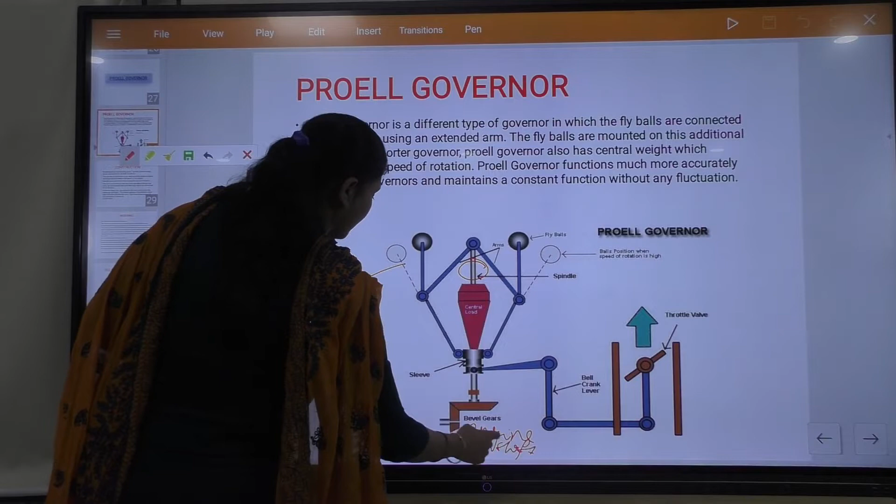So, let me again remind you of the parts. This is the spindle of the Proell governor which is connected with the engine shaft. Here your engine shaft will be there, and you can see this is the bevel gear which connects the spindle with the engine shaft. So, these are your arms. One end of the arms is pivoted with the spindle at this point, and these are your links. This is one link, this is another link.

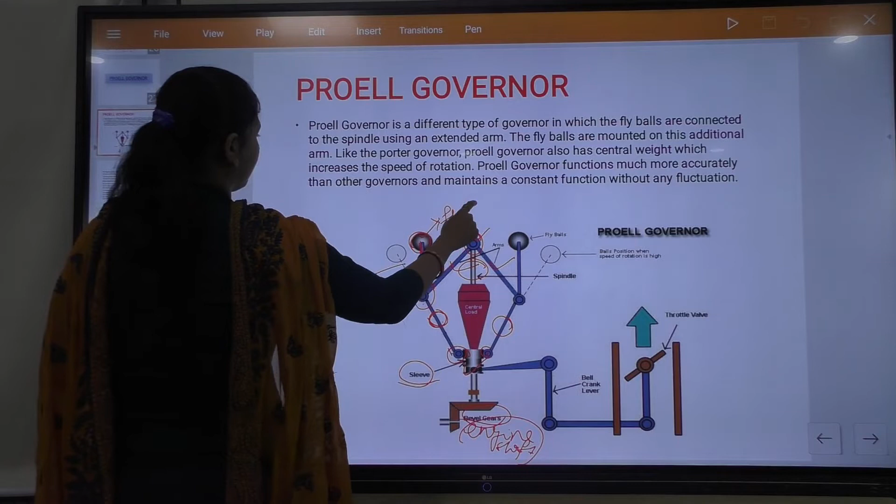One end of the link is connected with the arm at this point, and the other end is connected with the sleeve. This is your sleeve. So, from this point, this is your extended arm which is connected with the fly balls. This is the fly ball. This side also, this is your fly ball.

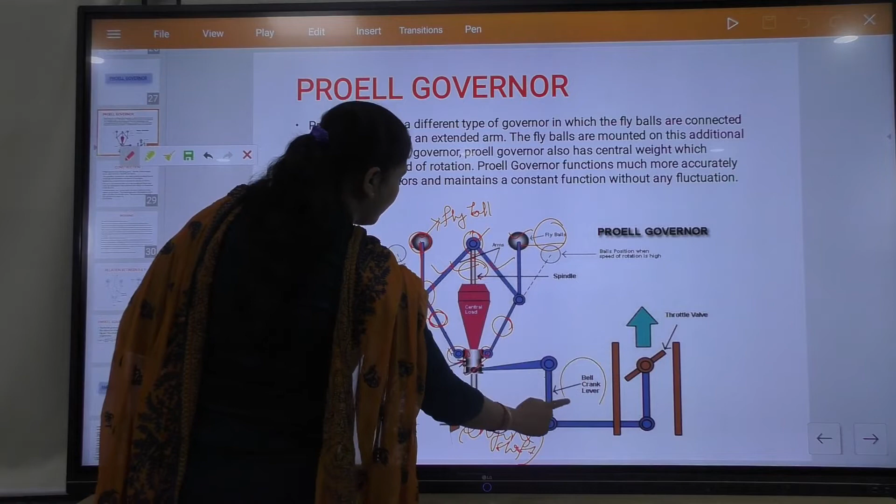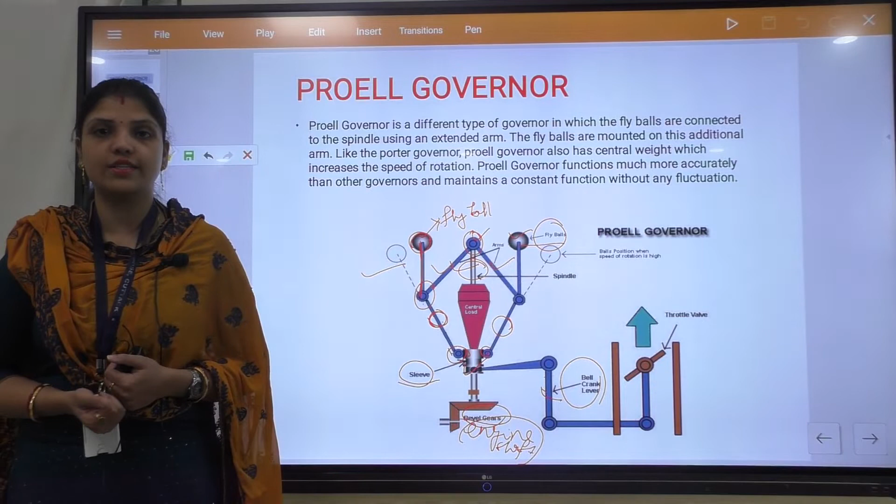So, this sleeve is connected with the throttle valve with the help of a bell crank lever, and it operates the mechanism of the fuel flow. So, this is all about the construction of the Proell governor. We already discussed the construction part, so let us move towards the working of the Proell governor.

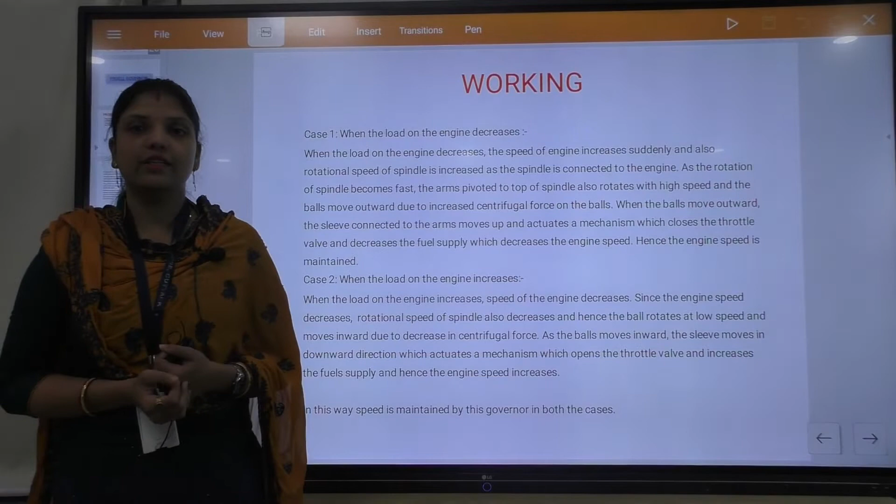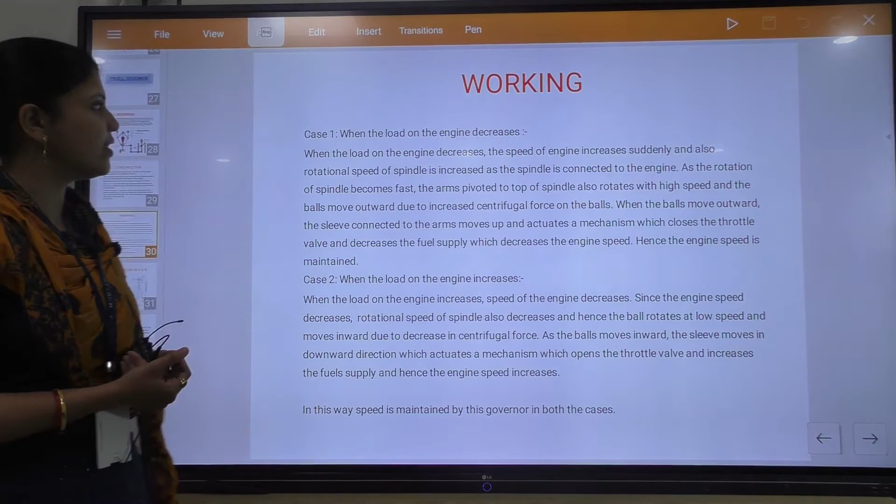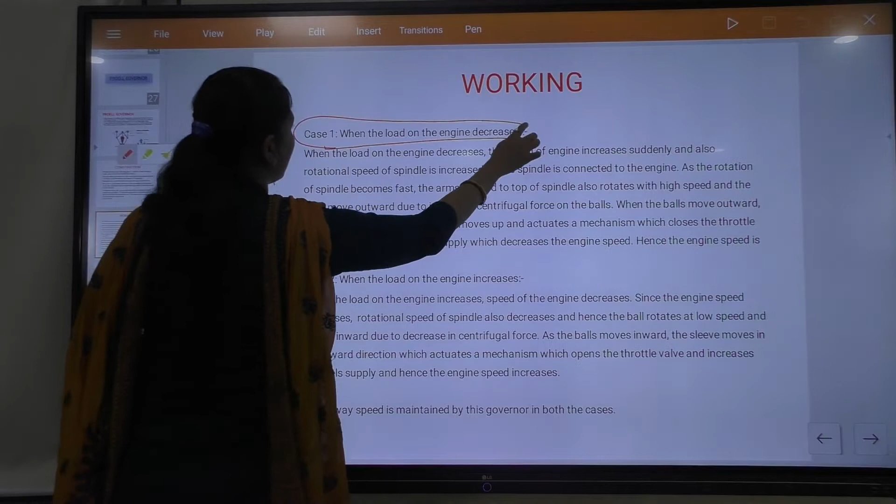As studied in the case of other governors, there are two cases for working: first, when the load on the engine increases, and second, when the load on the engine decreases. So, let us consider case 1, that is, when the load on the engine will decrease. So, what will happen? When the load decreases, we already studied that the speed of the engine will increase.

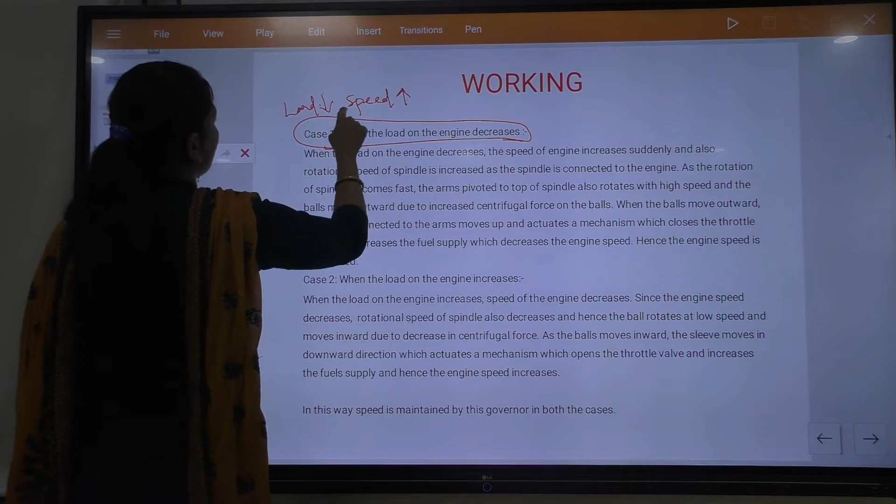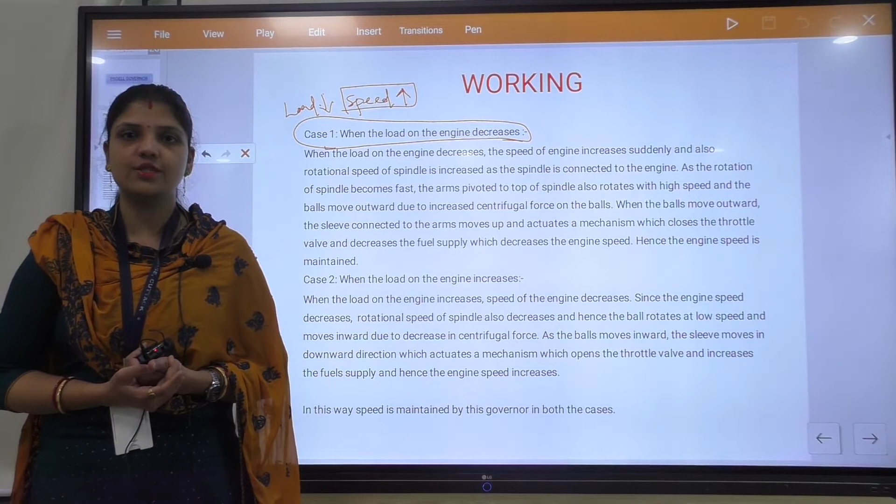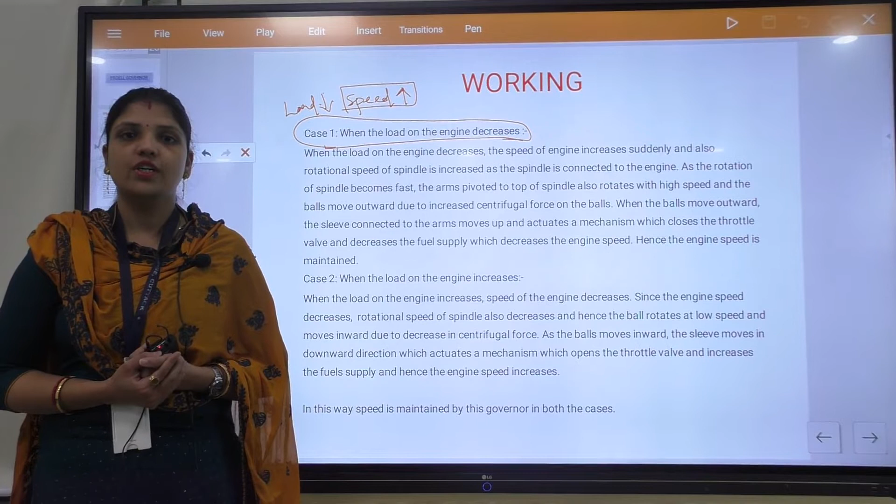So, when the speed of the engine increases, since the spindle of the governor is connected with the engine shaft with the help of a bevel gear, the rotational speed of the spindle will also increase. Due to the increase in the speed of the spindle, the governor balls will move in the outward direction, because the centrifugal force on the governor balls will also increase, and due to this outward movement of the governor balls, the sleeve will move in the upward direction about the spindle.

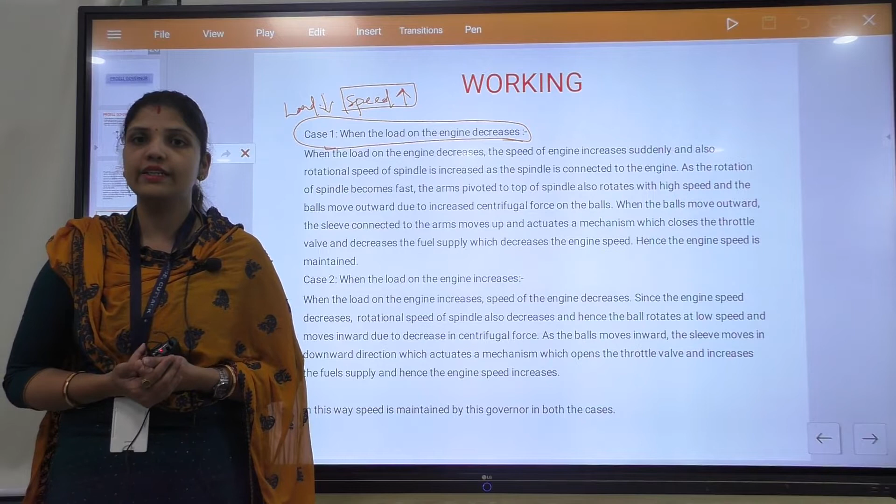Due to the upward movement of the sleeve, it will activate the mechanism of closing of the throttle valve with the help of the bell crank lever, since the sleeve is connected with the throttle valve through the bell crank lever. Due to the closing of the throttle valve, the supply of fuel or working fluid will decrease, and due to this decrease your speed will also reduce, and our mean speed can be maintained. So, this is case 1, when the load on the engine decreases.

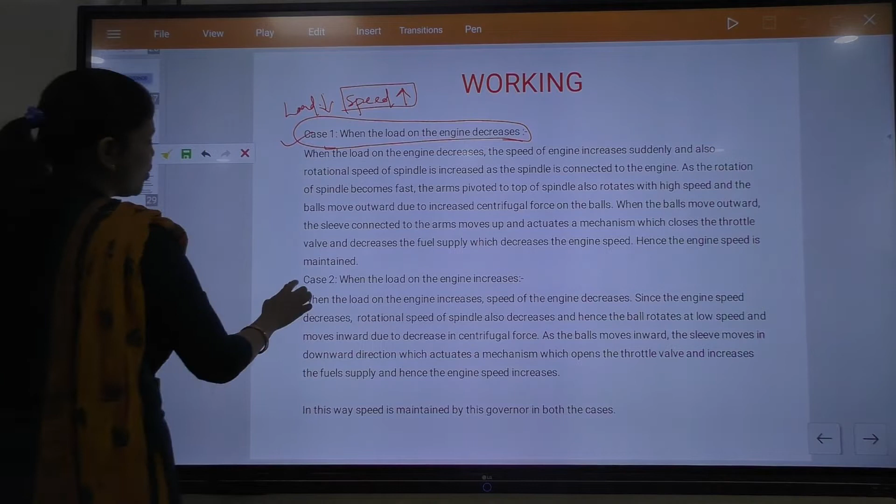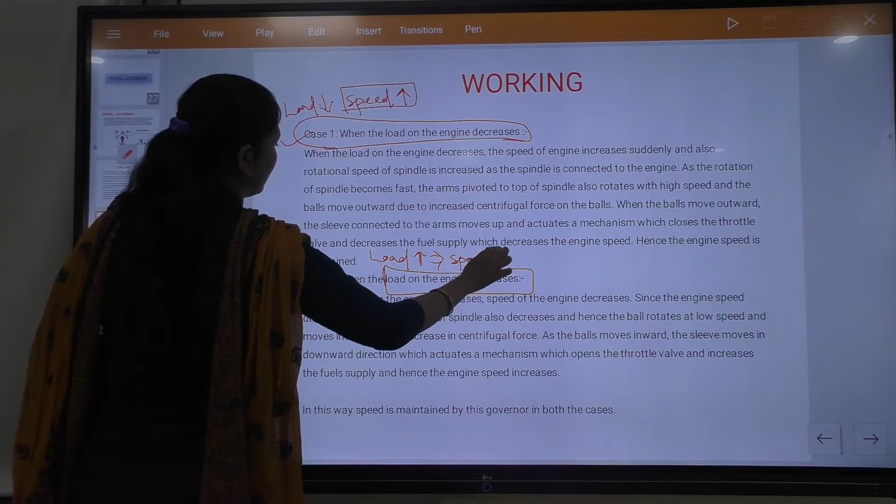Now, come to case 2, that is, when the load on the engine increases. So, what will happen? When the load on the engine increases, it will reduce the speed of the engine. As I said in case 1, the engine is connected with the spindle of the governor with the help of a bevel gear. So due to the decrease in the speed of the engine, the rotational speed of the spindle will also decrease.

Now the centrifugal force on the fly ball will also decrease, and due to this decrease in centrifugal force, the fly ball will move in the inward direction. Due to the inward movement of the fly ball, the sleeve will go in the downward direction, and this downward movement of the sleeve will activate the mechanism of opening of the throttle valve, since the sleeve is connected to the throttle valve with the help of the bell crank lever.

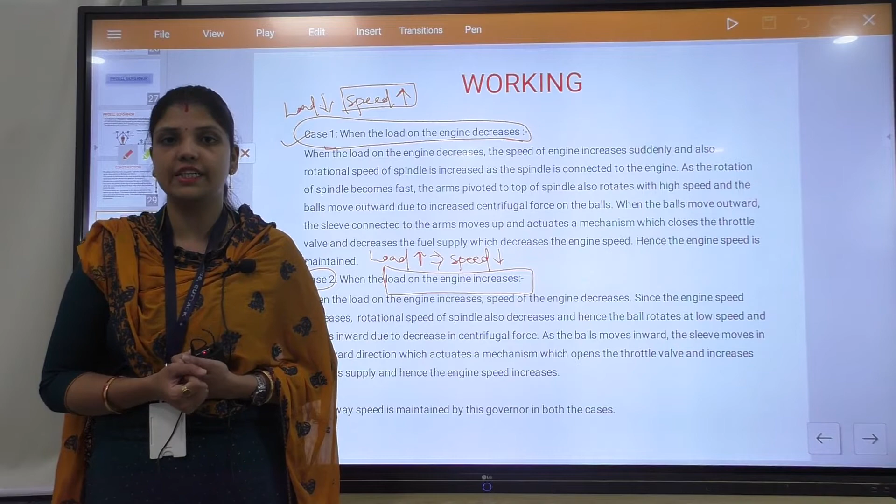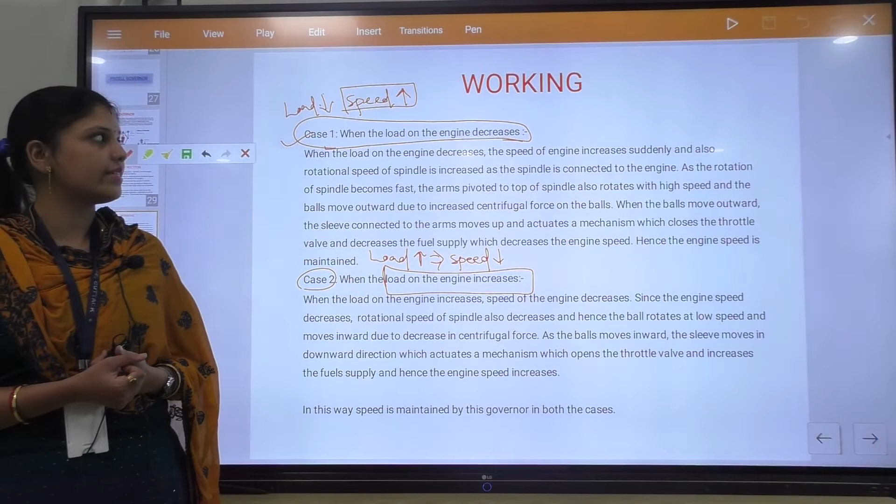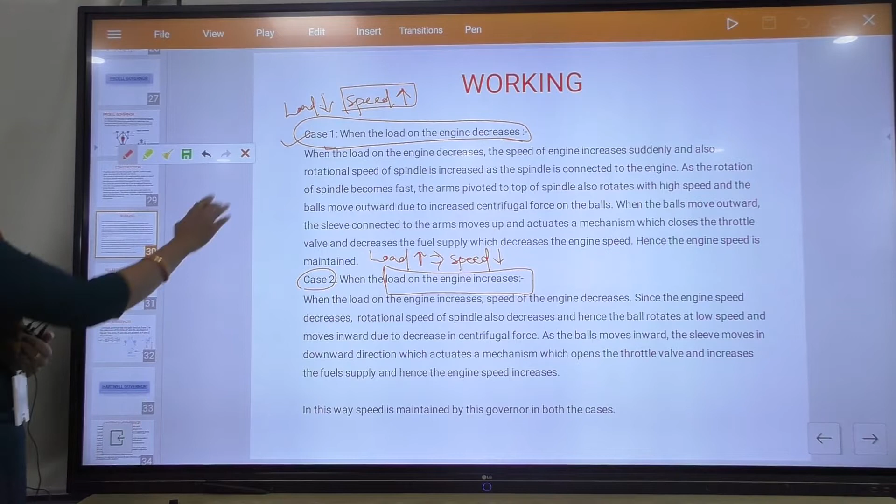Due to the opening of the throttle valve, the fuel supply will increase, and this increase in fuel supply will help in increasing the speed of the engine, and hence the mean speed of the engine can be maintained. So this is all about the working of the Proell governor, and in this way the mean speed is maintained in both cases, when the load decreases and when the load increases. So this is the functioning or working of your Proell governor.

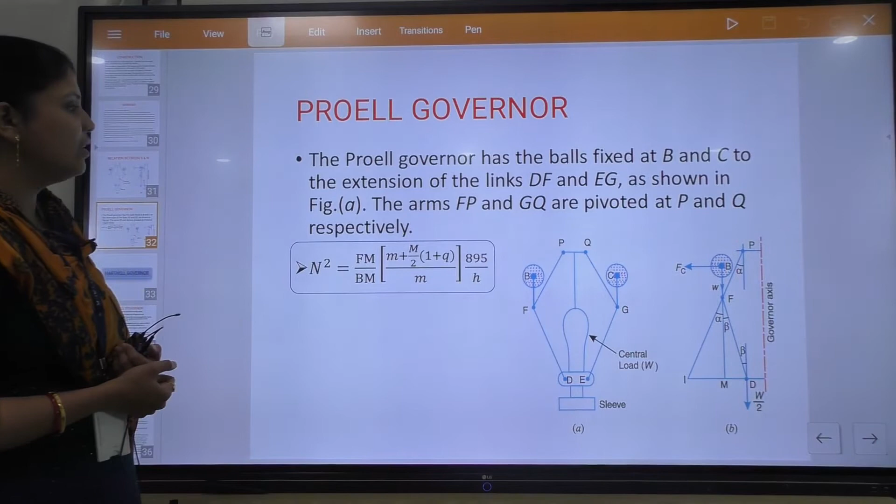Now come to the relation between the height of the Proell governor and the rotational speed. So, before going into the relation, let me tell you the terminologies which are given in the free body diagram.

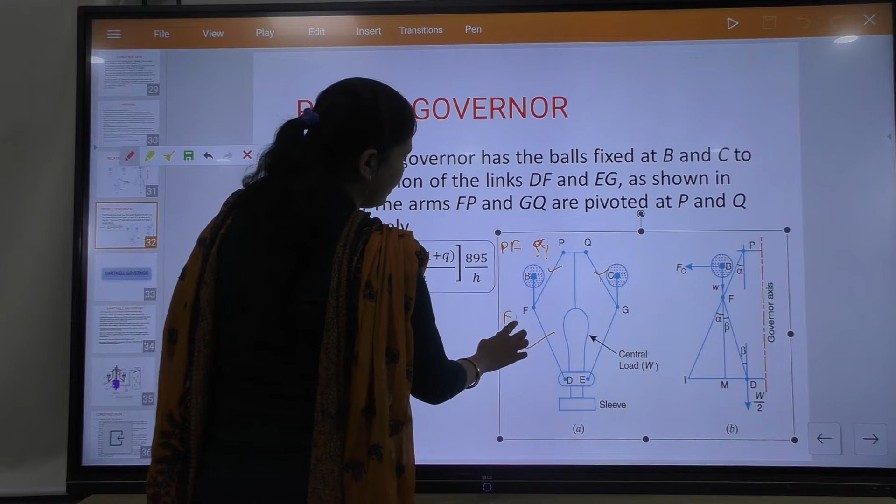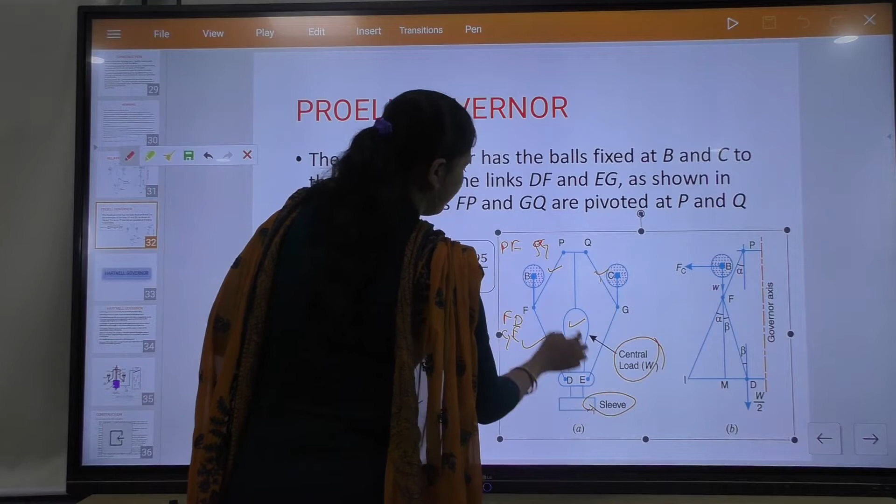So this is the diagram of your Proell governor. This is your arm, denoted by PF and QG. These PF and QG are your arms. These FD and GE are your links. This is the central load whose weight is denoted by W. This is the sleeve. This is the extended arm, that is BF, and this is your fly ball. Okay. This is another extended arm, CG.

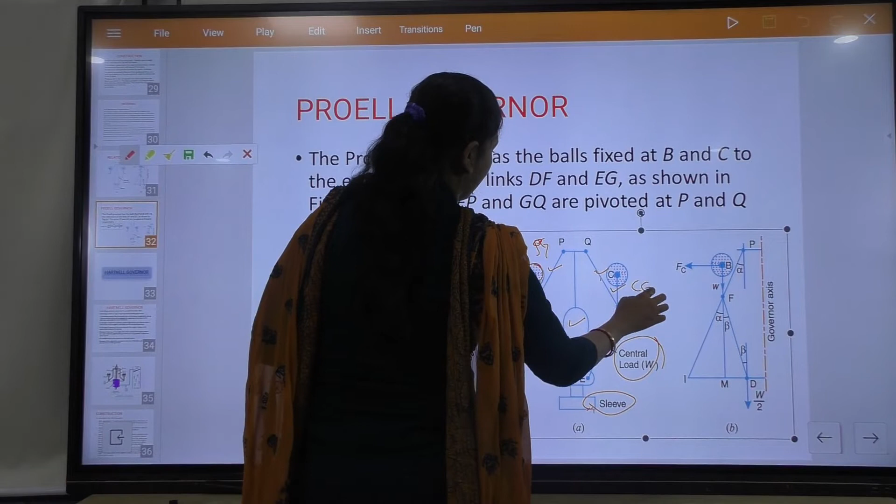So this is the free body diagram. This diagram shows only one side of the governor. Okay. So here you can see this FC. FC is the centrifugal force acting in the outward direction on the fly ball. So in this fly ball, this FC is shown here. The weight is the weight of the fly ball.

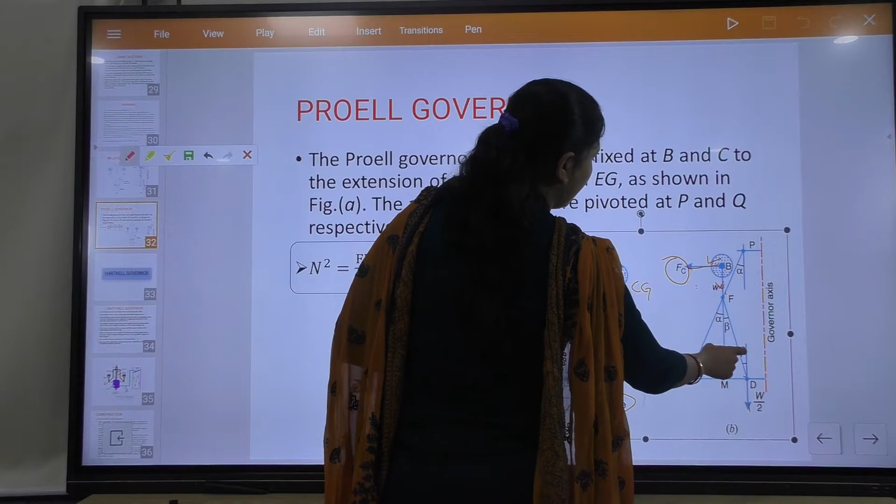This is the weight of your central load, and here you can see beta. Beta is the angle between the link and the vertical axis, and here alpha. Alpha is the angle between your arm and the vertical axis.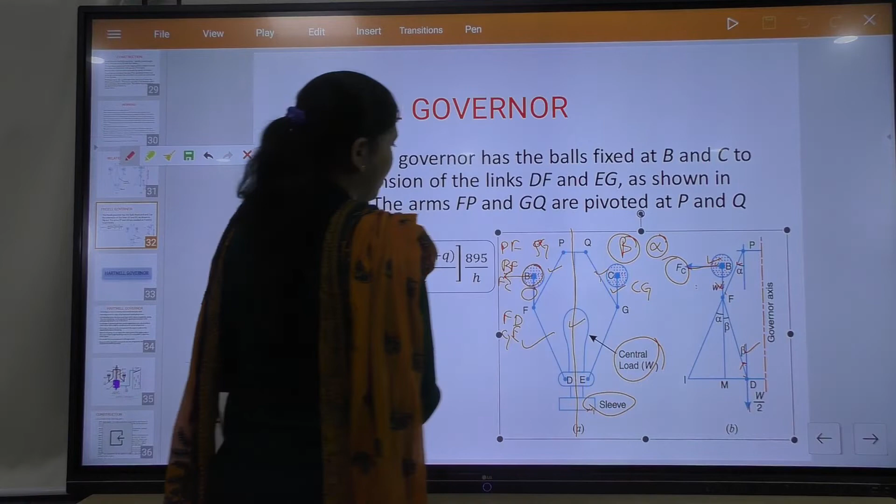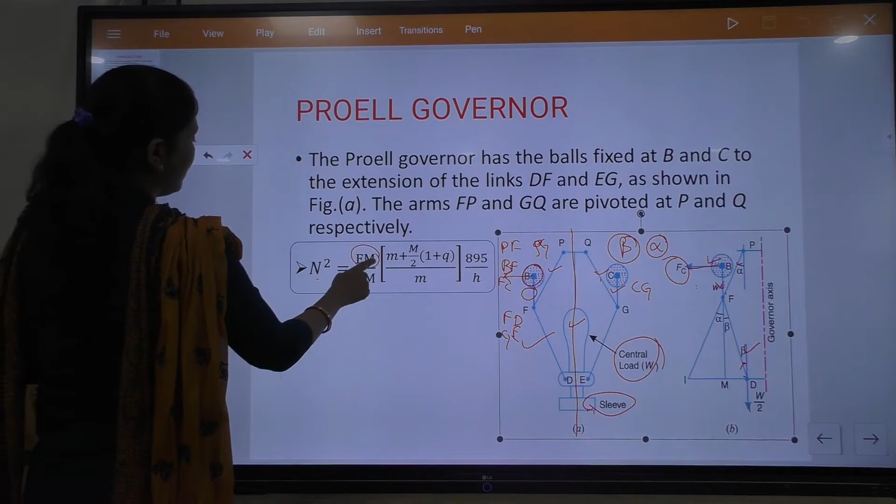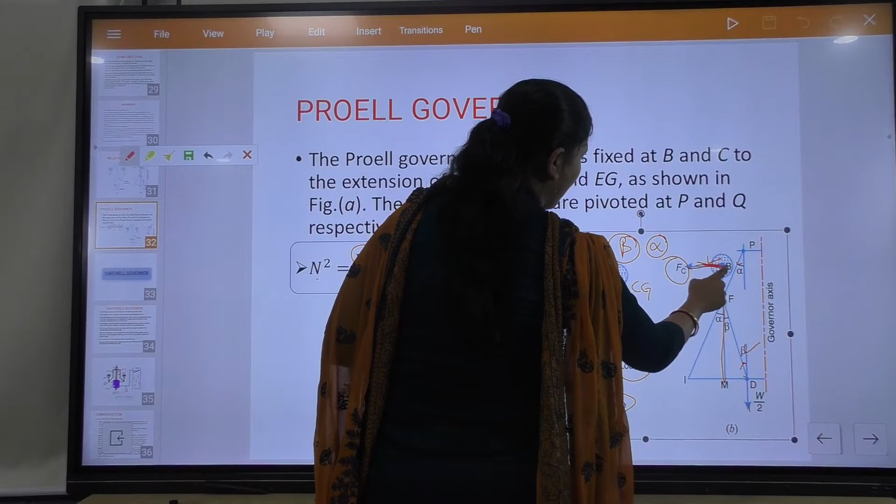Okay. So now come to the relation between the height of the governor and the rotational speed. So the relation involves Fm by Bm. So which distance is Fm? Fm is this distance, from the center of the fly ball up to this end point. This is Bm. So the relation is Fm divided by Bm into m plus M by 2 into 1 plus q, divided by m, into 895 divided by h.

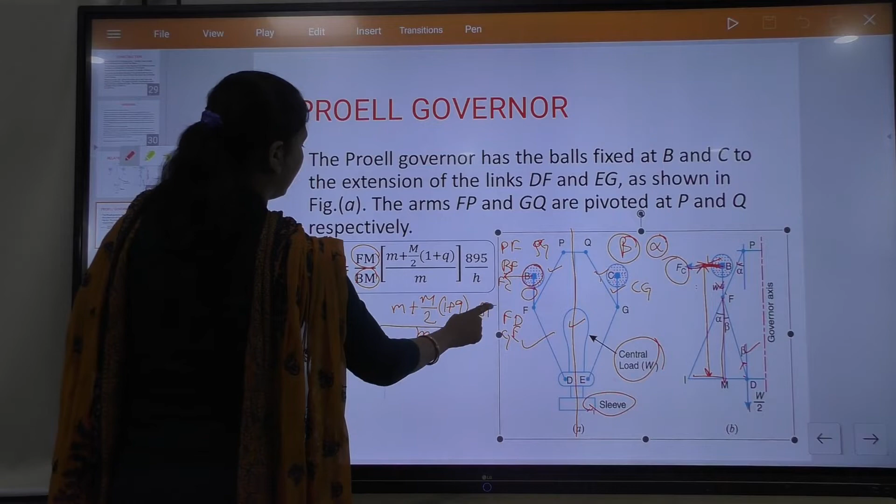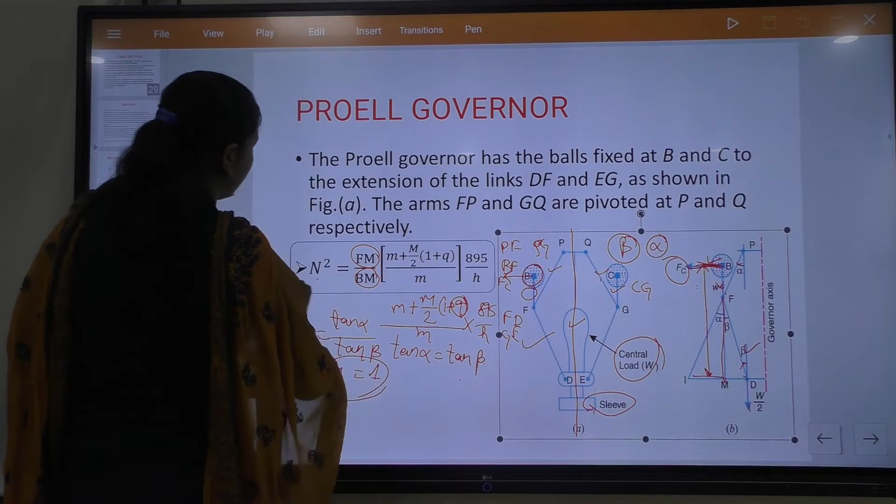So here this q is equal to tan alpha divided by tan beta, and when the lengths of both arm and link become equal, the value of q will be equal to 1, because tan alpha becomes equal to tan beta. So this is the relation between the height of the governor and the rotational speed. So this is all about your Proell governor.

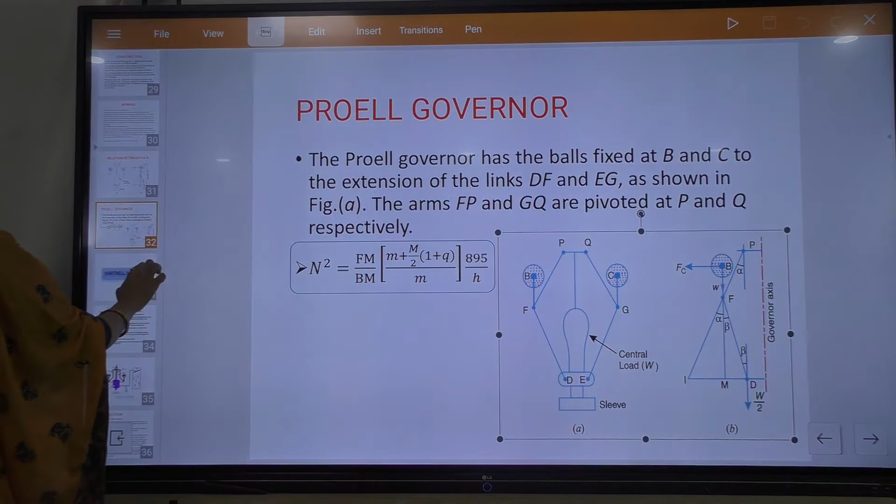Now come to another type of governor, that is your Hartnell governor. While we were studying the classification of governors, I told you that governors are also classified as spring controlled governors. This spring controlled type includes the Hartnell governor. So let us study the Hartnell governor in detail. A scientist named Hartnell discovered this governor in the year 1875.

So what is the difference between the Hartnell governor and the previously studied Watt, Porter and Proell governors? First, we studied the difference between the Watt governor and the Porter and Proell governors: there is no central load or dead weight in the Watt governor, but there is a central load in the Porter and Proell governors. Similarly, in the Hartnell governor there is no central load or dead weight, and the downward force is applied with the help of a spring. That means the central load is replaced by a spring in the Hartnell governor.

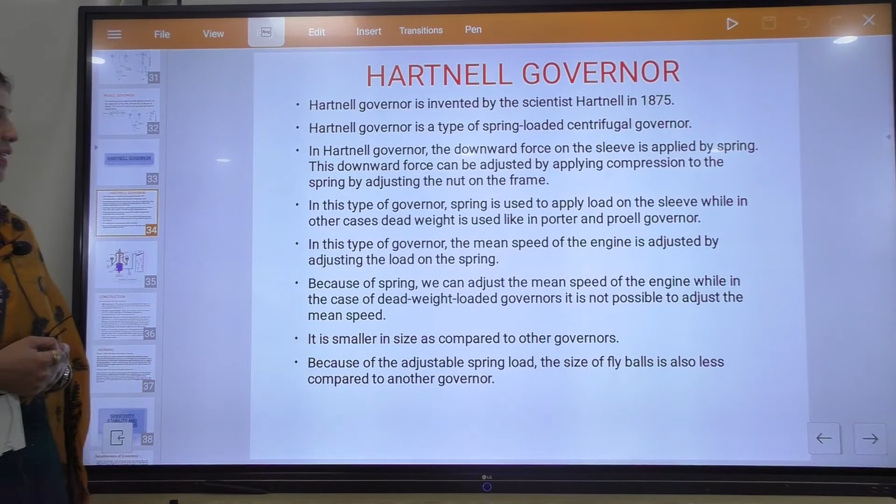So the downward force acting on the sleeve is due to the compression of the spring, and here a nut is present which helps to control the downward force acting on the sleeve. That means the downward force on the sleeve can be changed, and due to this the mean speed of the engine can also be controlled, which is not possible in the dead weight governor. So this is the basic difference between the dead weight governor and the spring controlled governor.

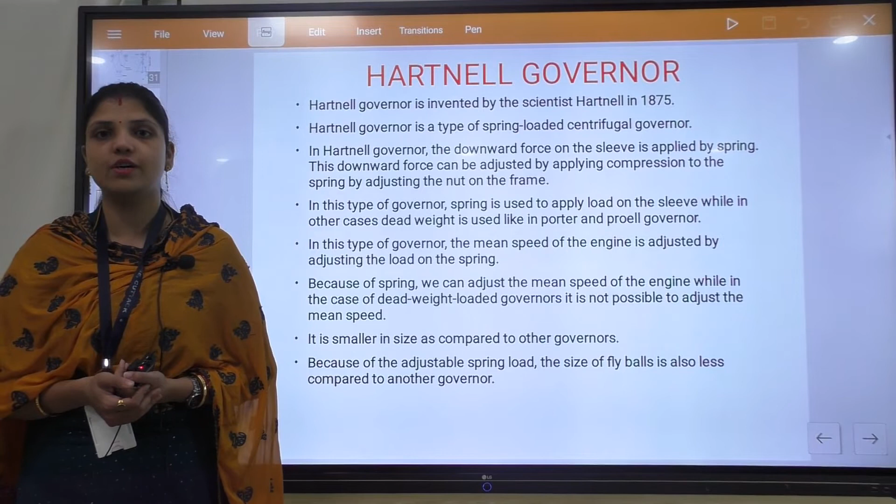Another difference is that the size of the fly ball in the Hartnell governor is smaller in comparison to the dead weight governor. Also, the size of the governor itself is smaller in the Hartnell governor as compared to dead weight governors like the Porter and Proell governors.

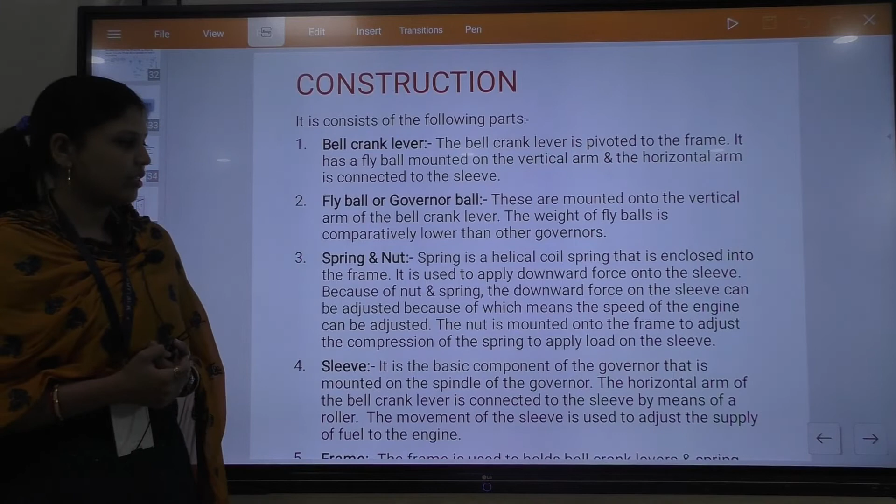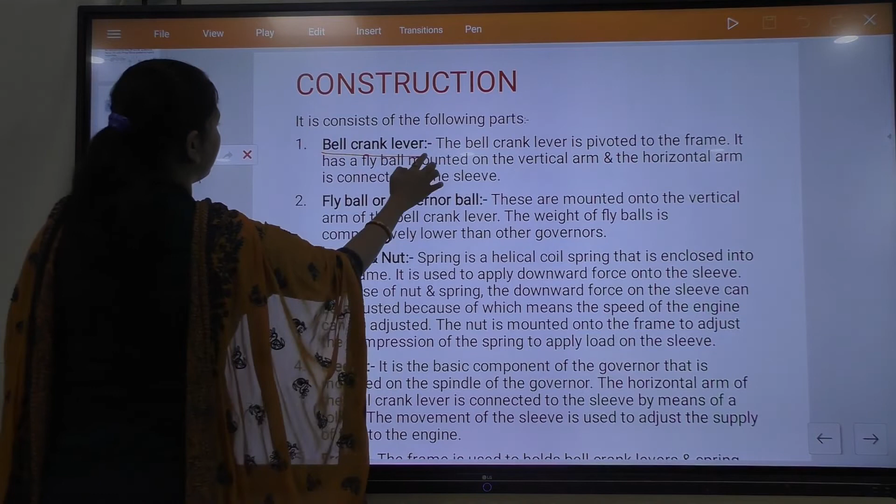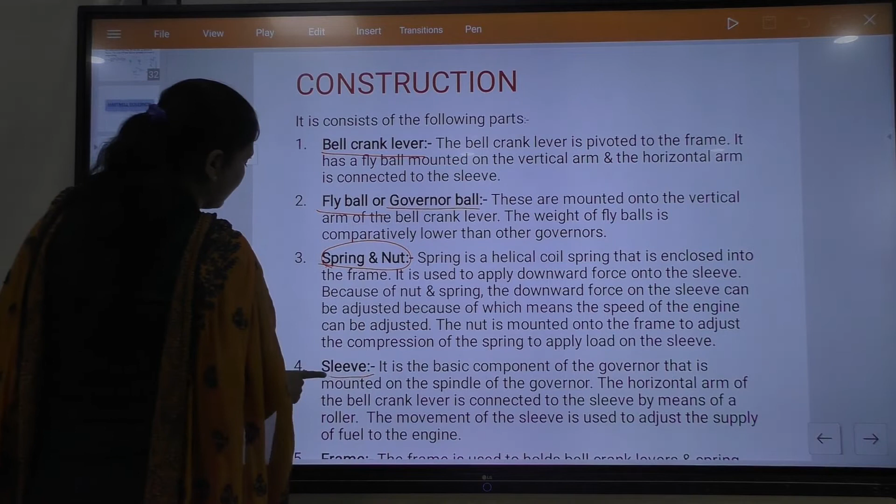So now come to the construction of the Hartnell governor. The parts of the Hartnell governor are: first, the bell crank lever; second, the fly ball or governor ball; third, the spring and nut, which I told you about; next, the sleeve; and last, the frame. So with the help of the diagram we will study the parts.

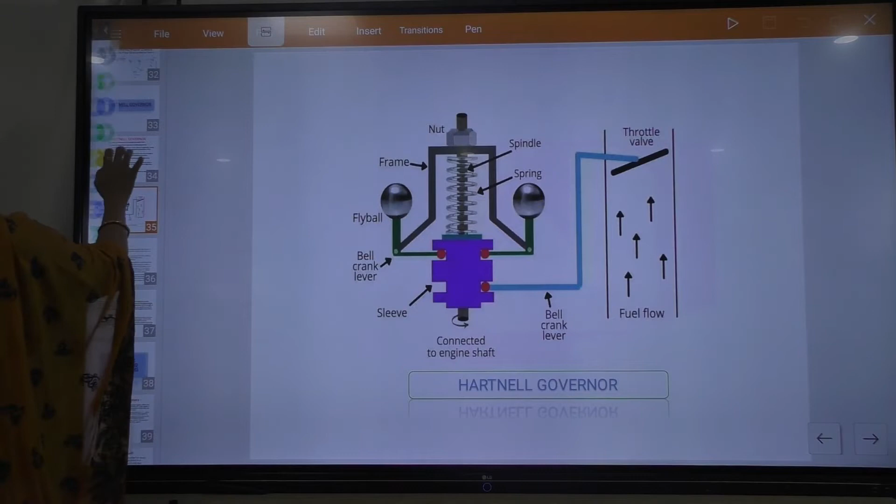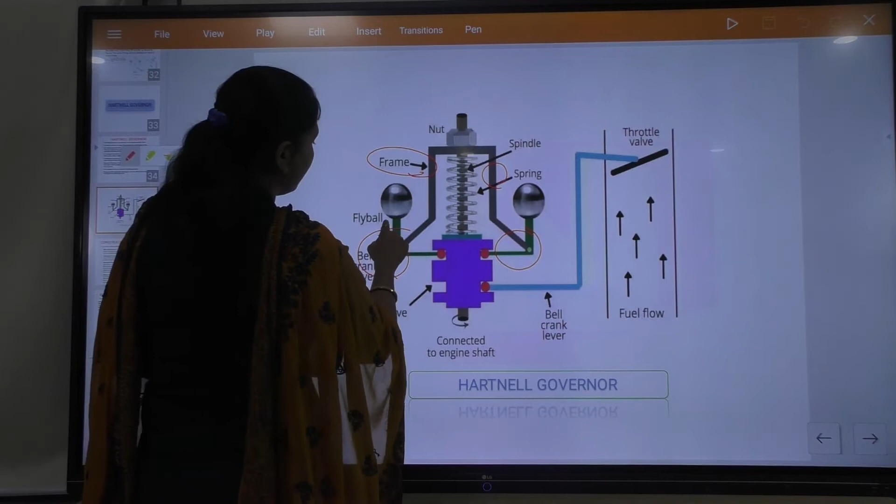So first one is your bell crank lever. Here you can see this is your bell crank lever, and this is your frame. So this bell crank lever is connected with the frame, and here it is connected with the sleeve. There are two arms of the bell crank lever: one is this vertical arm and this is the horizontal arm. The vertical arm is connected with the fly ball. This is your fly ball or governor ball. This horizontal arm is connected with the sleeve. This is the sleeve and these are the rollers.

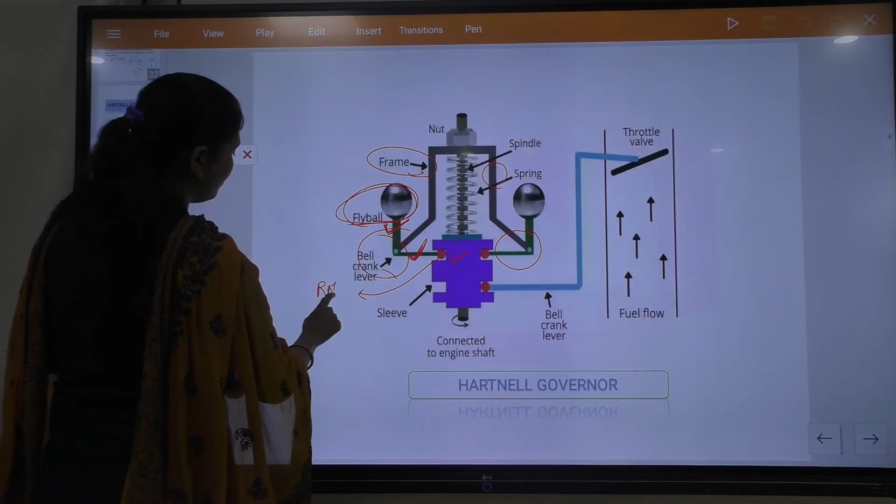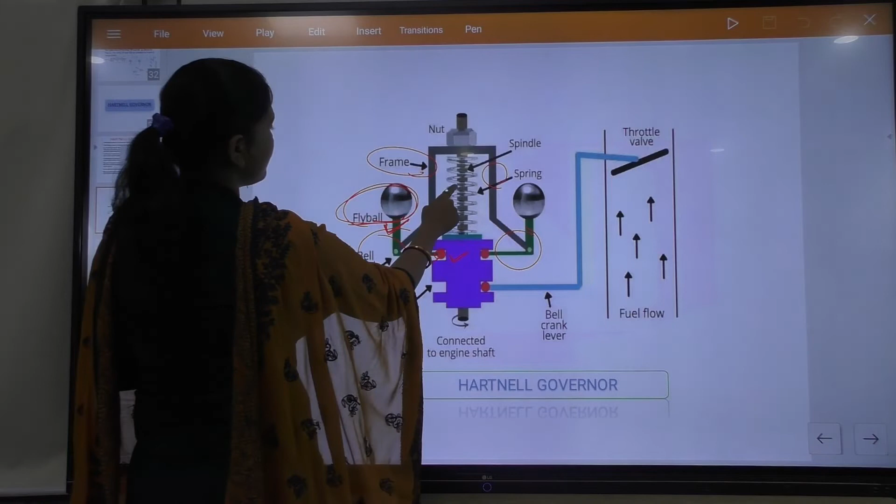So the horizontal arm of the bell crank lever is connected with the sleeve, and the rollers are present here between the horizontal arm and the sleeve. Okay. So this is the spring. This is the spring which is present between your frame and the sleeve.

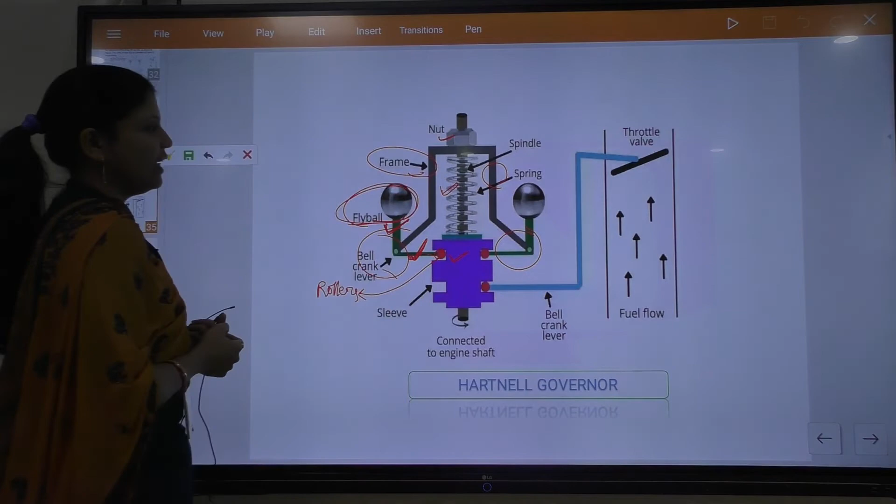So here is the nut. This nut helps to adjust the compression of the spring, and with the help of this the downward force that is acting on the sleeve can be adjusted, and due to this adjustment we can also adjust the mean speed of the governor. So this spring can be extended or can be compressed, and we can adjust it with the help of this nut.

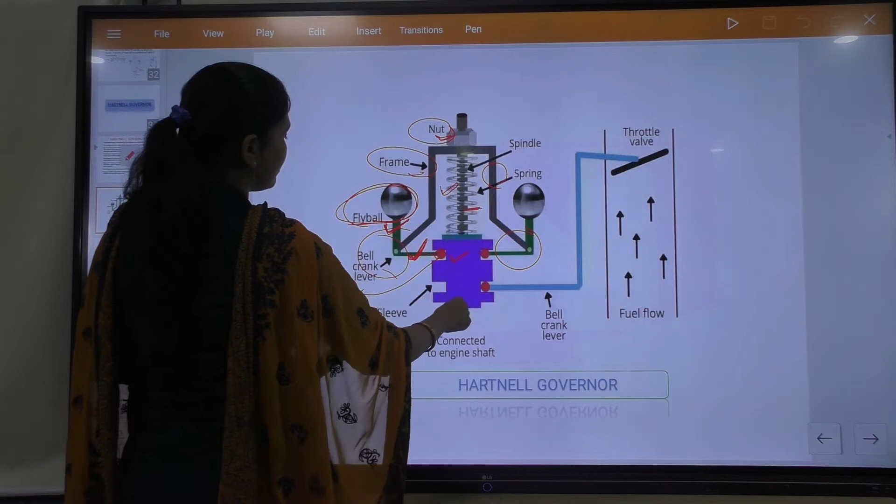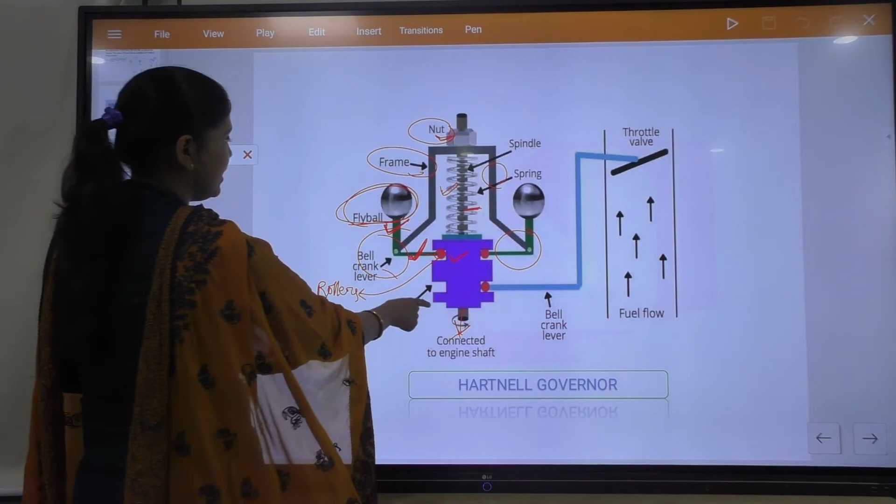This is your spindle. Here this is the spindle that is connected with the engine shaft. That means when the engine will rotate, the spindle will also rotate. Now this is your sleeve. Sleeve can move up and down in this spindle, and there are two stops present to limit the movement of the sleeve.

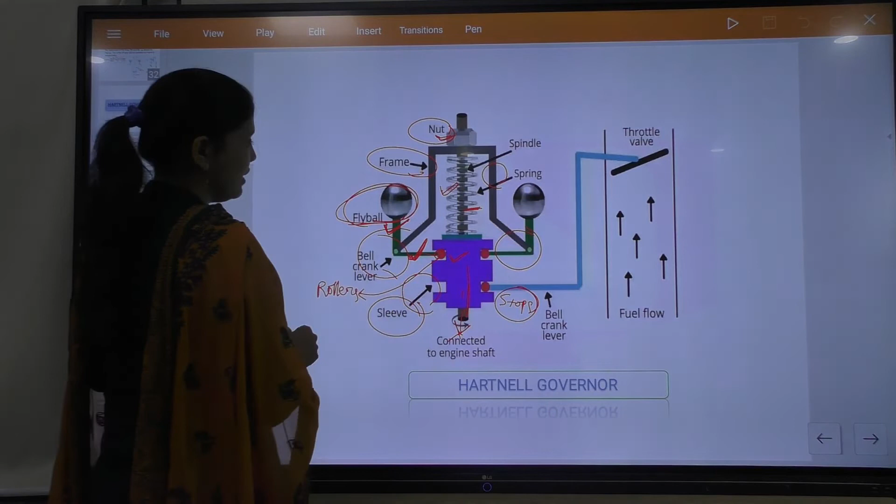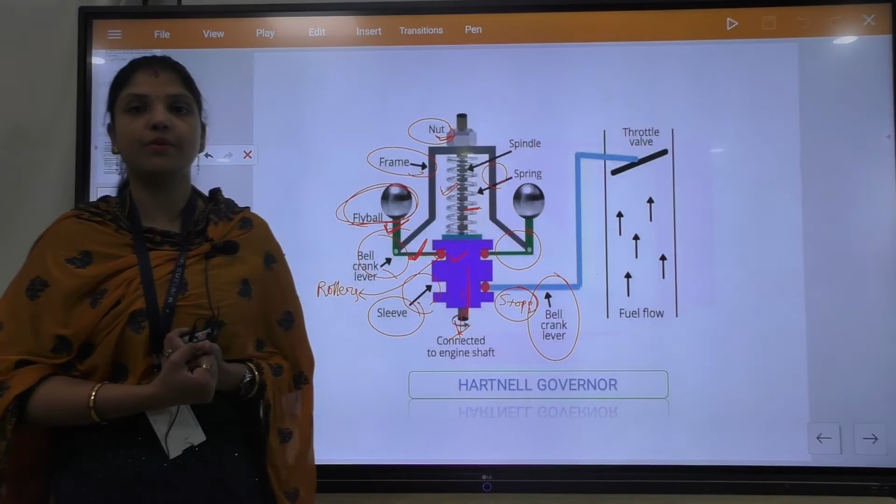Okay. Now the sleeve is connected with the throttle valve with the help of this bell crank lever, and it will operate the mechanism of opening and closing of the throttle valve. Okay. So this is all about the construction of the Hartnell governor. Now come to the working.

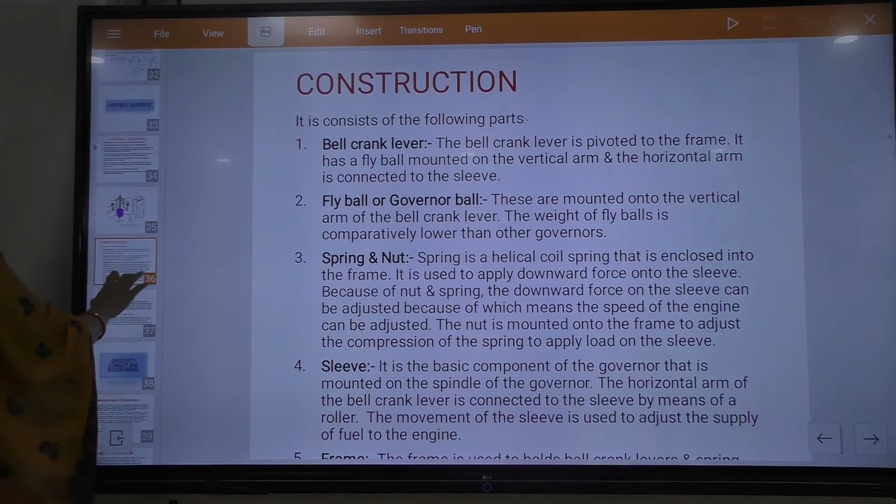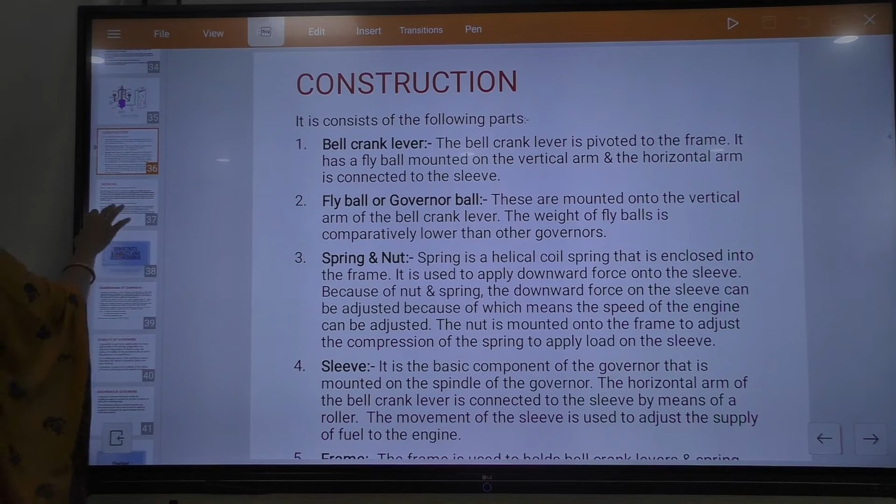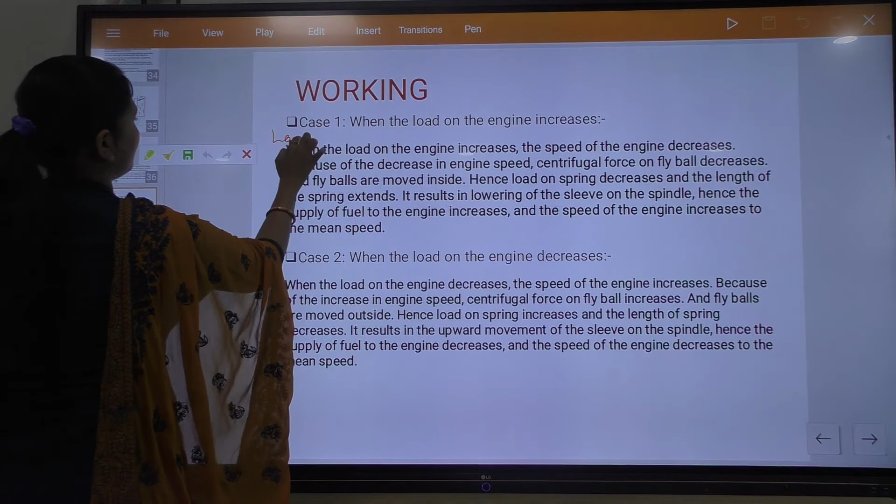So just as we studied about the working of other governors, there are two cases. First one is when the load on the engine increases, and second one when the load on the engine decreases. So let us start with case 1. Similar with other governors, when the load on the engine increases, the speed of the engine will decrease. Okay. So due to decrease in the engine speed, since your spindle of the governor is attached with the engine shaft, the rotational speed of the spindle will also decrease.

Due to decrease in the speed of the spindle, the centrifugal force on the fly ball will also decrease. So the fly balls will move in the inward direction. Okay. So now the load on the spring will decrease and it will extend, and the sleeve will move in the downward direction. Due to the downward movement of the sleeve, it will activate the mechanism of opening of the throttle valve, and due to opening of the throttle valve, the fuel flow will increase, the speed will increase, and in this way our mean speed can be maintained. So this is about case 1 when the load on the engine increases.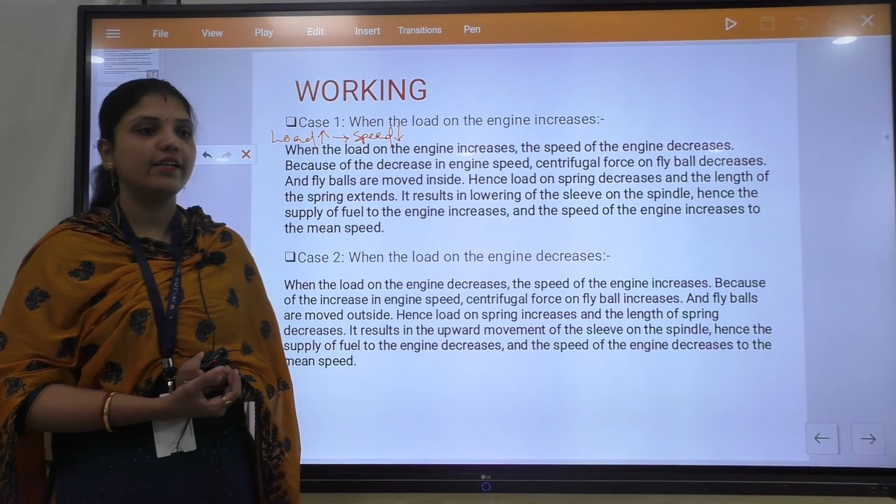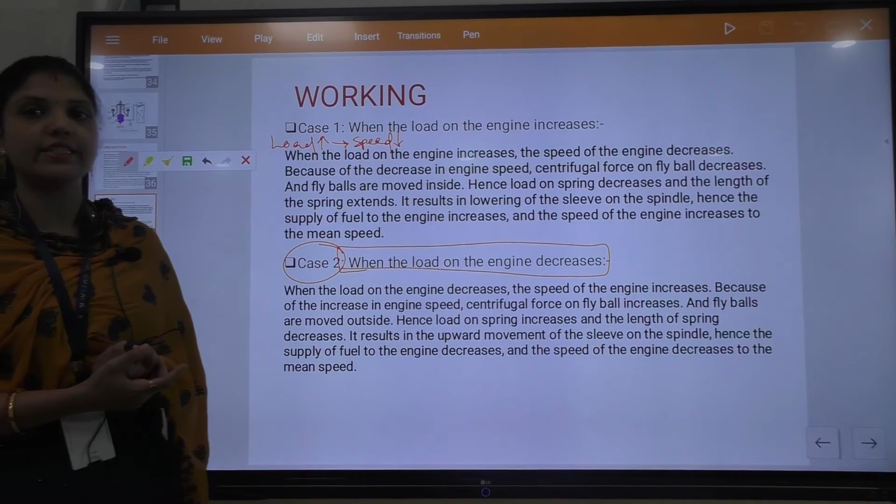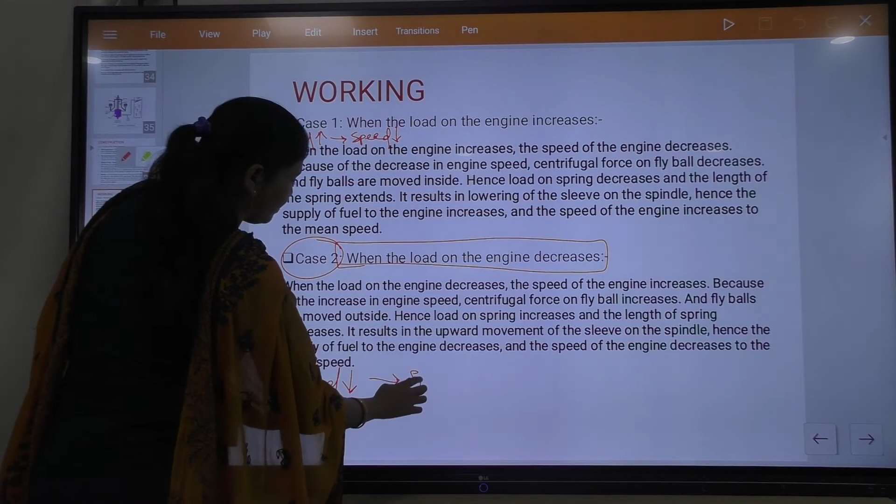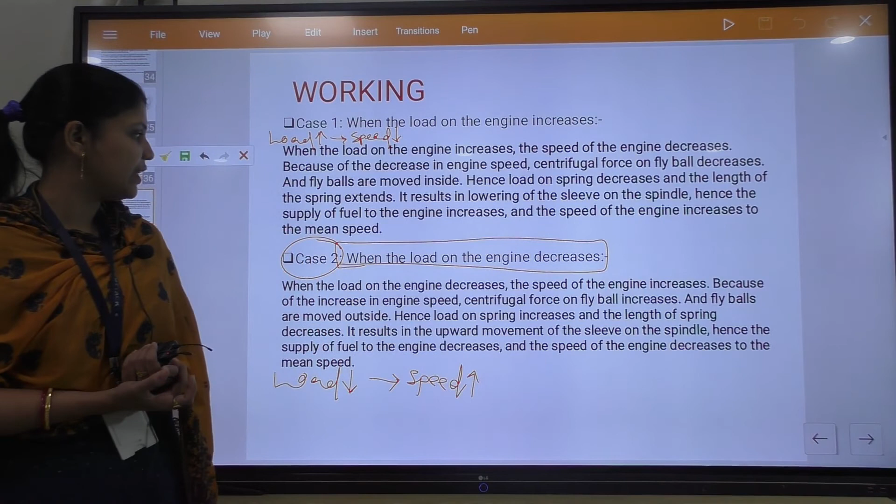Now come to case 2, when the load on the engine decreases. So what will happen? When the load on the engine decreases, the speed of the engine will increase, and the engine shaft is connected with the spindle of the governor with the help of bevel gear. So the rotational speed of the spindle will also increase, and this will increase the centrifugal force on the fly balls. So the governor balls will move in the outward direction, and the load on the spring will increase, and it will compress.

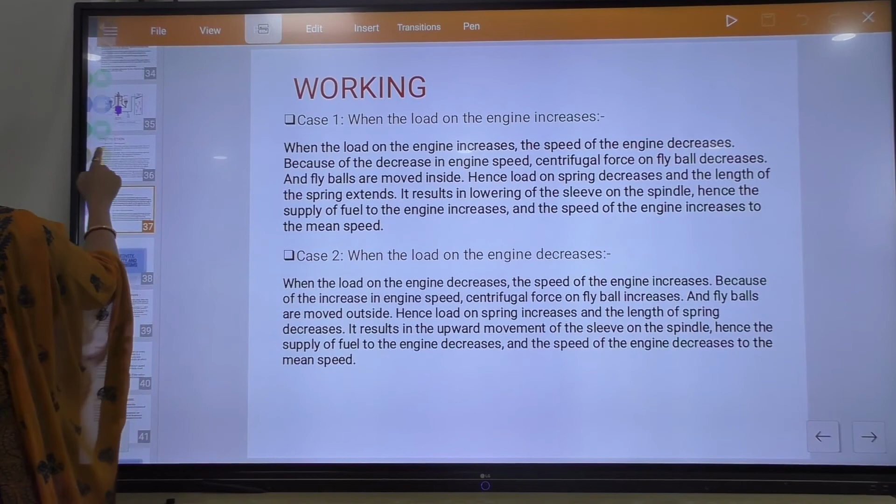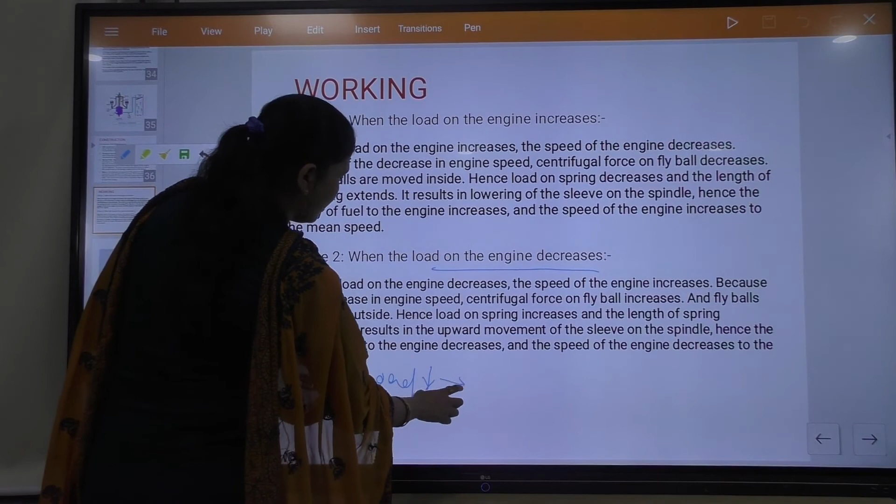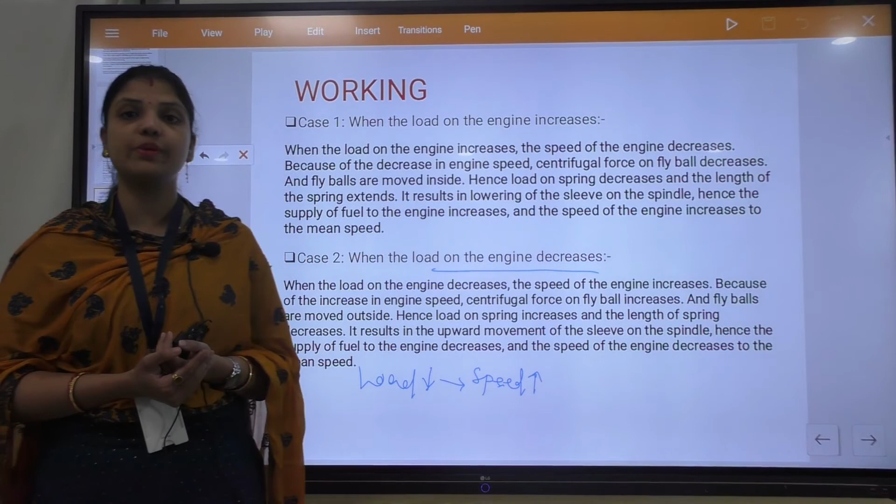So we discussed case 1, that is when the load on the engine increases. Now come to case 2, that is when the load on the engine decreases. So we know that due to decrease in load, the speed of the engine will increase. I already told you that the engine shaft is connected with the spindle of the governor with the help of a bevel gear. So due to increase in the speed of the engine, the rotational speed of the governor spindle will also increase, and the centrifugal force acting on the governor balls or the fly balls will also increase.

So due to increase in the centrifugal force, the fly ball will start moving in the outward direction, and the radius of rotation will also increase. This will cause the upward movement or upliftment of the sleeve. The sleeve will move upward and it will activate the closing mechanism of the throttle valve, because the throttle valve is connected with the sleeve with the help of a bell crank lever, and due to closing of the throttle valve, the fuel supply or working fluid supply will decrease, which will reduce the speed, and mean speed can be maintained. So this is all about the working of your Hartnell governor.

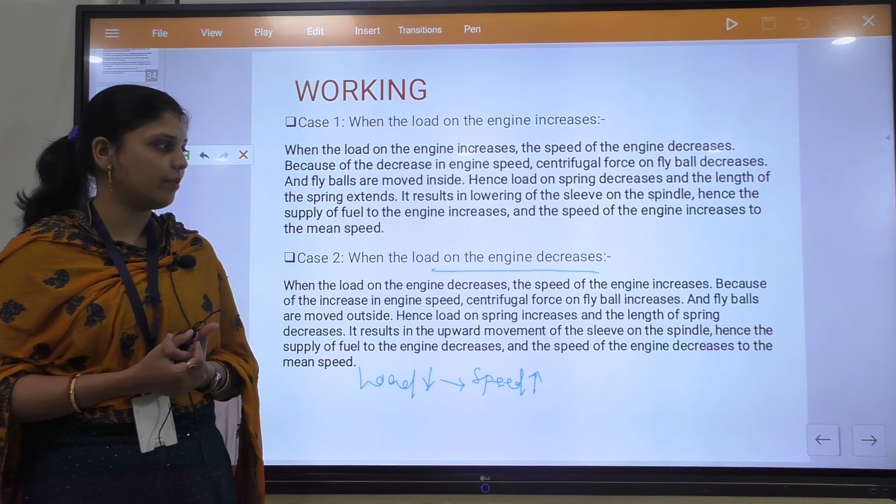So for today's class, this is all about your Hartnell governor, and in the next class we will study the conceptual explanation of sensitivity, stability and isochronism.